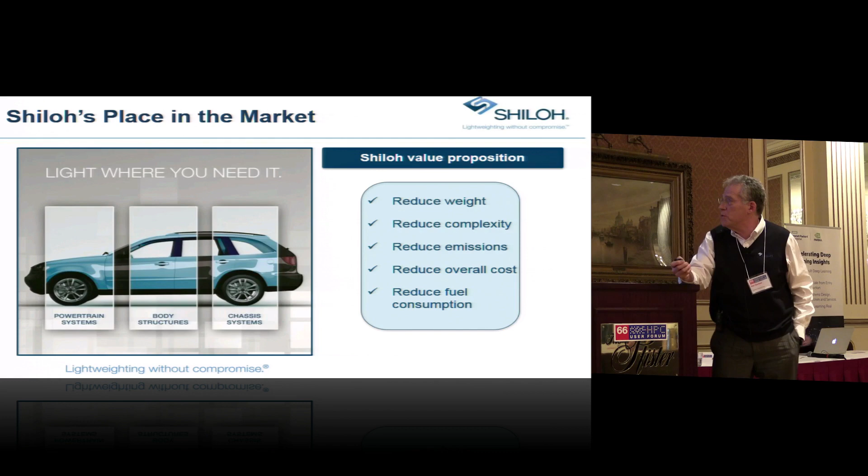As an organization, we work in a variety of different materials. One of the things about Shiloh is we like to think we're material agnostic, so we really don't care what the material is—it's a matter of finding the right material for the application. That's very telling because that's exactly what's needed in the industry now, as we're mixing more things together to come up with integrated structures that will help us lightweight, reduce emissions, and so forth.

So closures, driveline suspension, engine transmission, propulsion systems—we make parts for all of these bits of the automotive puzzle. We're in all three major continents: the US, Europe, and China. So we're offering these kind of similar solutions globally.

And that's of interest to the OEMs, because they're looking for the ability, if they're launching a project in a location, to launch similar projects with the same company in various places, since they're making platform identities more similar—it reduces their overall launch cost.

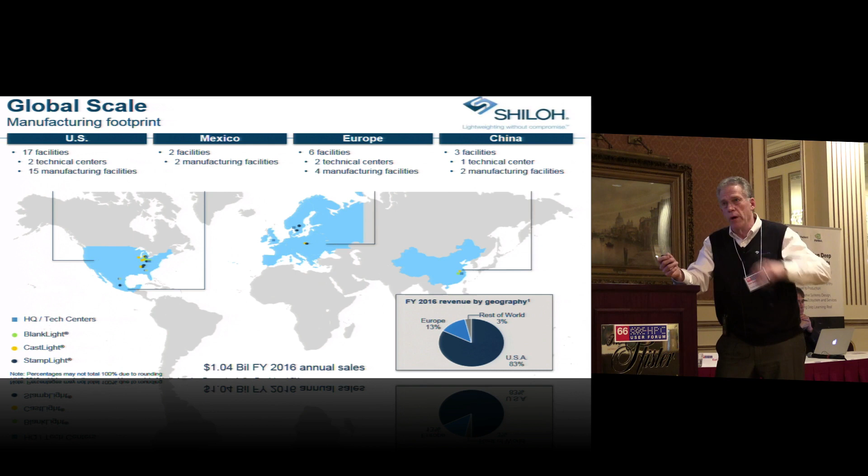So we're all over the world. We're about $1 billion in sales, a little bit over as of 2016, and we figure we'll be about the same this year. We're doing organic growth and growing with acquisition.

We all know about our transportation world—we have a lot of density problems, we have emission problems, and there are lots of trends. We're looking to drive emissions down, we're looking to drive miles per gallon up, and one of the ways to do that is to make sure the vehicle frames are as light as they can possibly be. That's one of the things we work on.

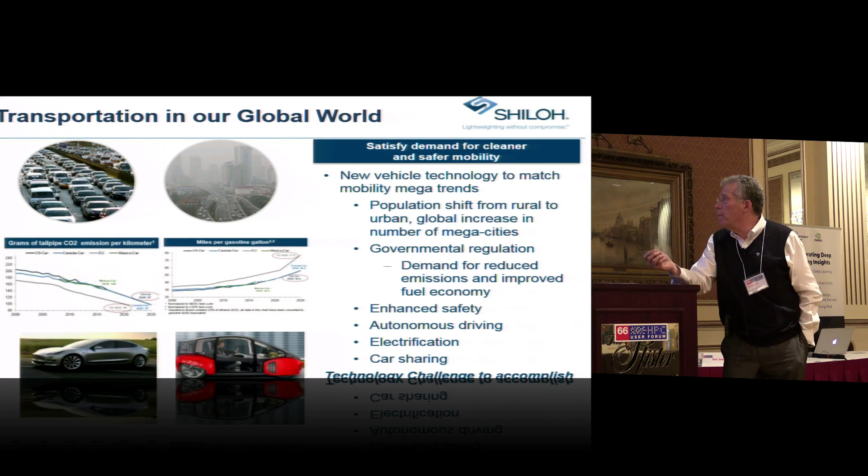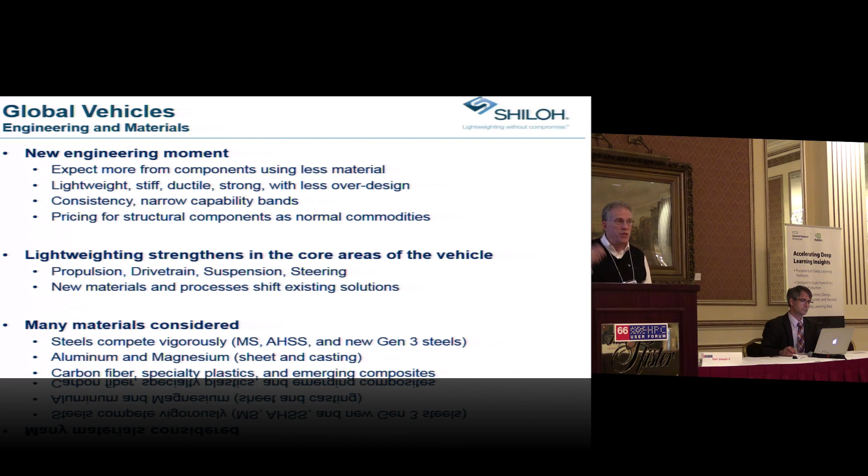So we're on this vehicle platform, in a new engineering moment. The OEMs are expecting more from the components using less material. So it's about lightweight, stiff, ductile, strong, less over-design, with consistency across the whole range of production. If I'm making 1,000 parts per day, all 1,000 parts need to be within that capability range for the properties they expect.

We're talking about replacing bits of the automotive puzzle that people's lives depend on. So it's extremely important that the consistency of the process—just like with chips, just like with medicine—is the same with these components that make up the frames of vehicles. We need narrow capability bands in our processing, and as important as anything else, customers want to buy structural components like they're regular commodities—nothing special, just perfectly executed every time.

So lightweighting is important in all four of the domains, and there are new materials coming out along with new processing that allow us to change this engineering conversation in every one of these component areas.

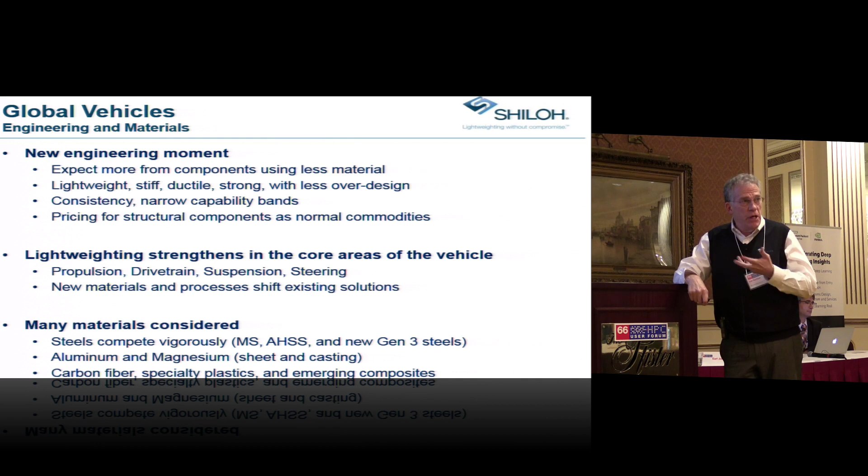A lot of parts are considered. Steels are still a primary focus in vehicles—they're inexpensive and there's a lot of good analysis behind them; they're very predictable. Aluminum, magnesium, both sheet and castings, are some of the things emerging into the market, as well as carbon fiber, plastics, and other emerging composites. So this is all the things that are changing.

We know the framing of body in white and panels, so body in white is that bit of the puzzle of building the vehicle. That's before the doors are added, before the wheels and suspension are added, all the closures, the seats. It's just before they dip it in the white paint before it comes up.

So these areas are traditionally steel, but in the process of driving this lightweight conversation, they're moving more and more into other materials.

One of the advantages is the simulation in the CAE for steel is very well developed. It's got a lot of history. These are components that are on the shelf in every one of the OEMs. They can take it down and say, okay, I'm going to use this steel for this application. I know how it's going to respond over the whole life of that particular design. So it's very low risk.

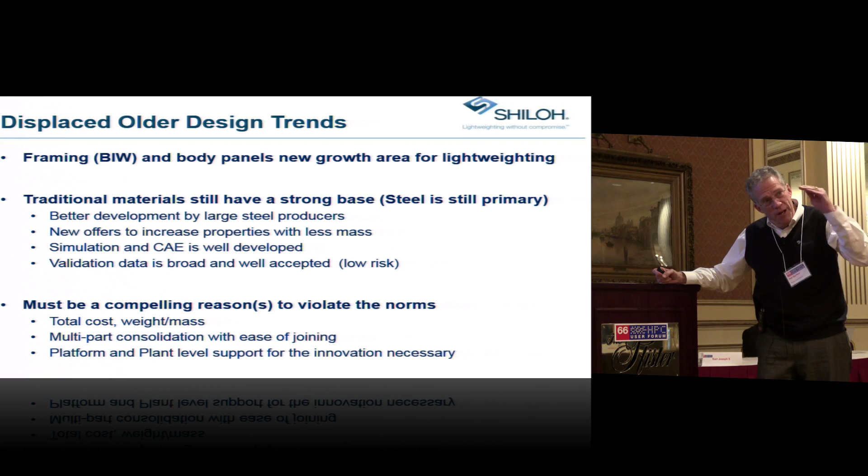So there's got to be some compelling reason, and by compelling, it means compelling and then validated with data, a strong reason to make a change. So you have people pushing, but at the same time you have engineering resisting, because engineers are typically conservative and they want to make sure that the integrity of the product remains at a very high level.

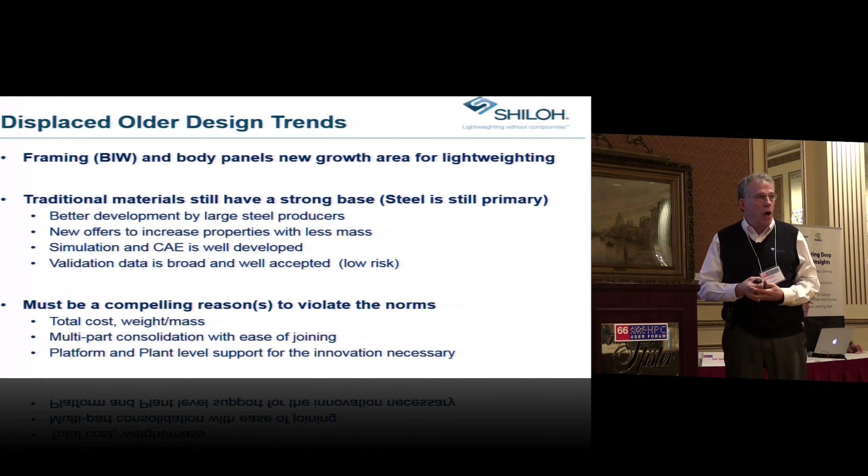So I'm kind of building a case as to why we're interested in the computing that comes from having big machines and big cores running a lot of nodes and analysis on the things that we're doing every day.

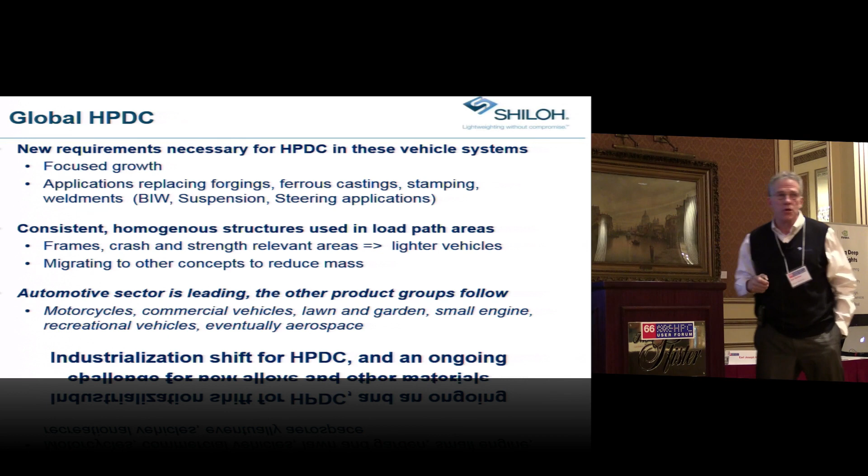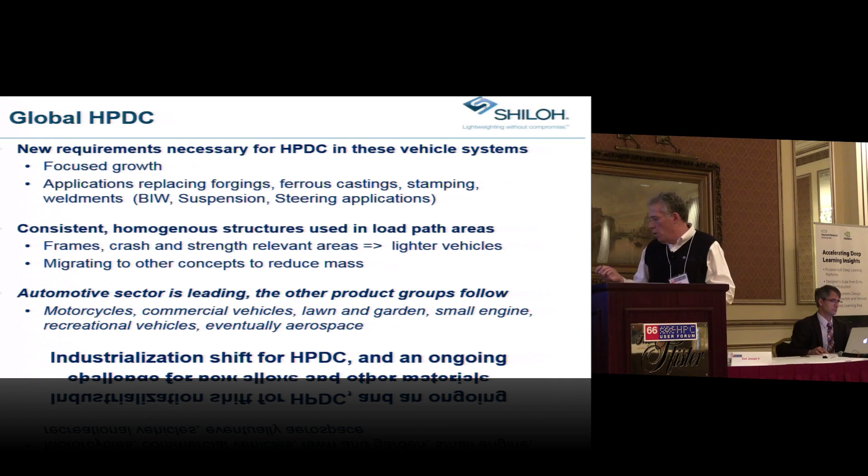You have to migrate to other concepts to reduce the mass. And whereas automotive is starting, it's going to follow all the rest of the vehicle structures and a lot of other white goods and so forth to be able to do lightweighting, using less of the material with greater properties every time. So if we look at the process of one of the casting processes we're engaged in, which is this high pressure die casting puzzle.

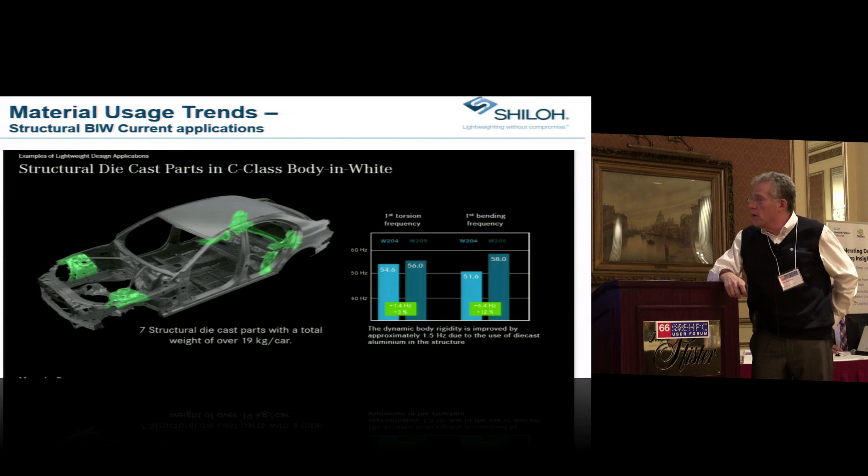In Europe and a lot of European vehicles, and starting in the US, there are a lot of places where these structural members are being introduced into the framing of the vehicle. And as you can see in this particular Mercedes vehicle, you got a 20 kg reduction in weight. So that's a big incentive to be able to take both the weight out and the cost out in these particular areas of the vehicle.

There are a lot of other vehicles that show up as being places in that frame where lightweighted structures end up being an opportunity.

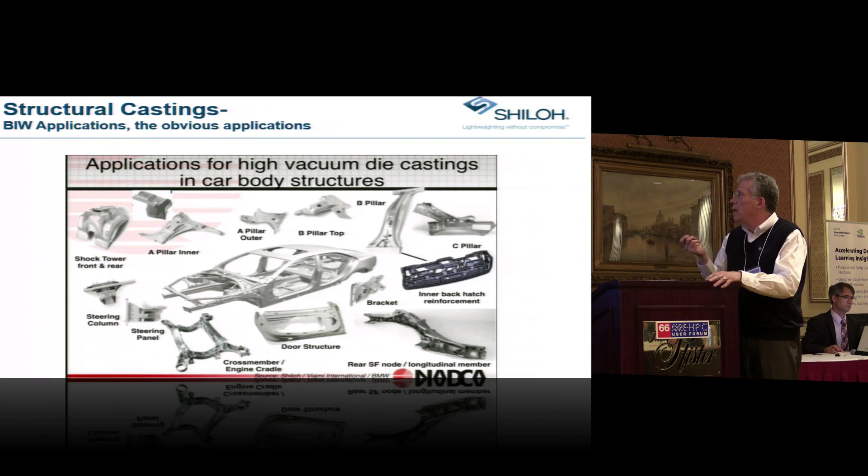If we're looking at the casting, there's the older casting methods which are gravity fed, which obviously are a lot simpler to model because they're moving at a very slow fill rate, and you can model a lot more simply. But the area that offers the greatest opportunity is this high pressure side, which has the greatest challenges on the modeling.

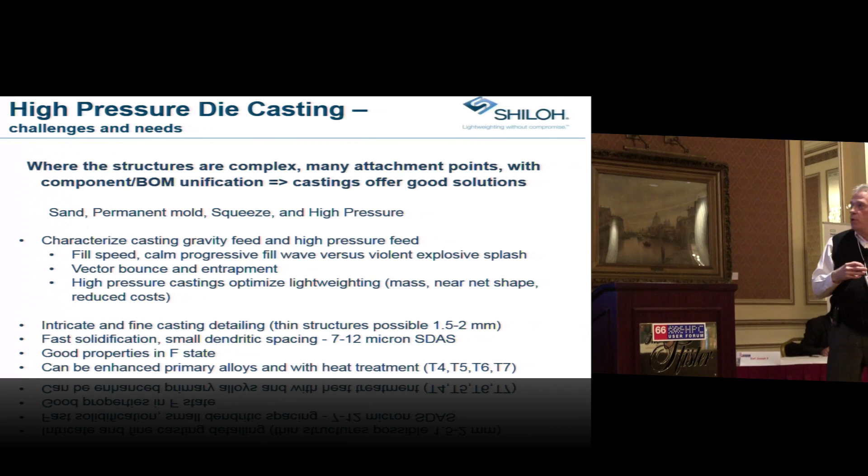So we talk about the high pressure having a fill speed that's very fast rather than a calm progressive fill. It has violent splash parameters on the inside of the die. It's got bounce, it's got entrapment, and that's an area where a lot of the casting optimizing and lightweighting is having a big impact.

So you've got fine details, might be a millimeter and a half or 2 millimeters or 2.5 millimeter wall sections. They're big castings, filling out over big areas. You've got very fast solidification. The dendrites are in the 7 to 12 micron spacing. It's got good properties without having to heat treat it. These are some of the advantages of being able to go with this very fast fill method.

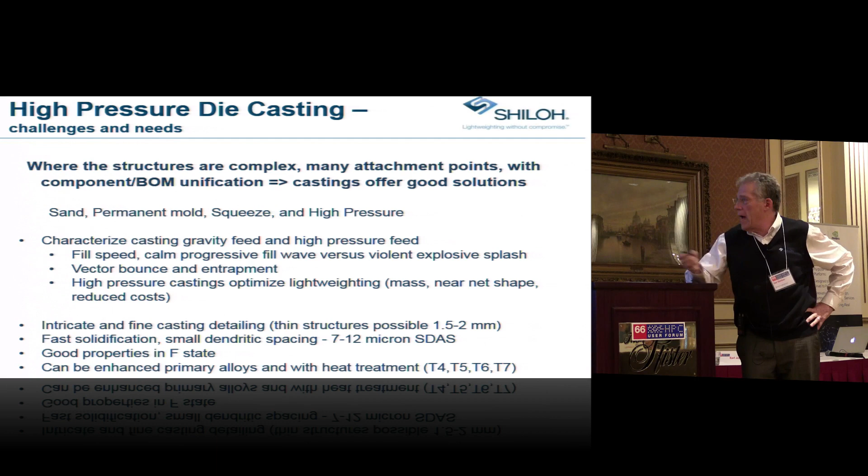And you can even enhance it with heat treating if you're doing the right things on your casting process. So one of the things that was looked at earlier was the dendritic size as a predictor of what the mechanical properties are for a particular shape.

So if you start looking at what would be the other casting methods, we have dendritic spacing that's maybe up between, let's say, 50 and 100 microns. And to get the necessary properties, you would have to heat treat them.

If you look at some of the casting, the high pressure casting methods, we've got dendritic spacing that's down in the 10 or 12 normally, and with stuff we're doing with some of the new technology, we're down to 6 to 9 microns in the spacing between dendrites. That ends up being a very good predictor of high properties, and that's one of the things we need if we're going to put these in a structural application in a vehicle.

So if you consider the modeling case, we've got this metal velocity that's moving. Maybe it's got a 15 or 20% fraction solid, so the viscosity is something you can predict within a range. It's typically pressured through a 3 millimeter gate, so you have a kind of atomization spray at maybe between 1,500 and 2,500 inches per second fill speed. Complex structures, very small radius, so you can imagine the modeling challenge of having 2 millimeter, 3 millimeter radiuses and corners and trying to see how that structure is going to fill.

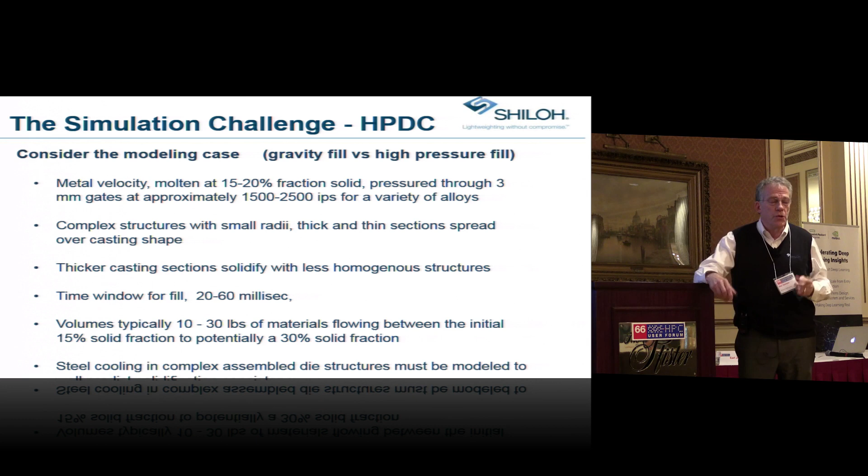Then, if we can model the cooling effectively, we can reduce the dendritic structure even smaller, because the dendrites are a function of cooling speed. And we end up getting 10 or 15% greater properties in the same kind of geometric shapes. So if you put the hat on of the engineer saying, okay, how am I going to get more properties out of less material? This is the path that I need to be taking.

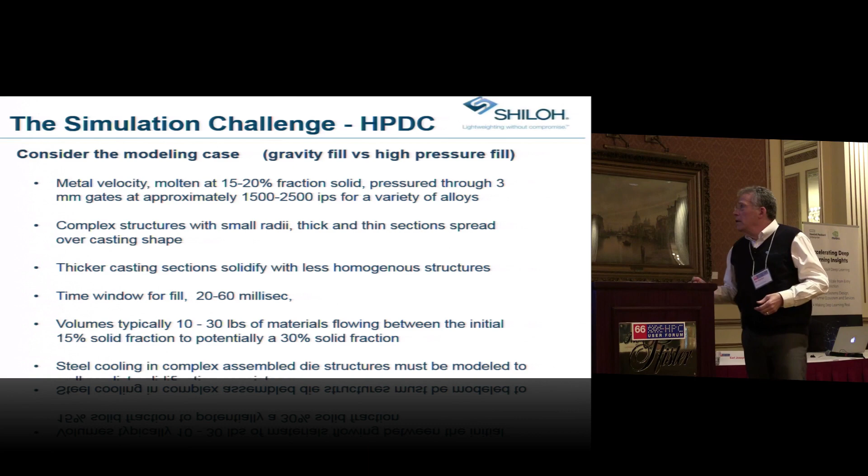So one of the things about castings is typically they were always over-designed because you couldn't end up predicting a homogeneous structure. So you would end up saying that if I were designing around 150 megapascals for a particular kind of Goodman curve yield on the life of a component, I might design around 70 if I have thick walls. So it was a kind of over-designing, which is very costly, and it's not something that engineers are looking at continuing to support. So the only way to be able to reduce the over-design is to really have a continuous homogeneous structure on the inside of a casting wall, which has to solidify quickly, it has to solidify the same way, and it has to be free of gas. And those were all problems that were part of the high-pressure die-cast solutions.

So we do all that right, and then we lightweight by reducing the mass of those typically loaded castings through the design and what we can do with our design areas. So this is kind of the challenge. You have this fast fill, you have streams of metal that need to flow together, and they need to knit and intermingle, and it's all happening in this 20 to 60 millisecond time window.

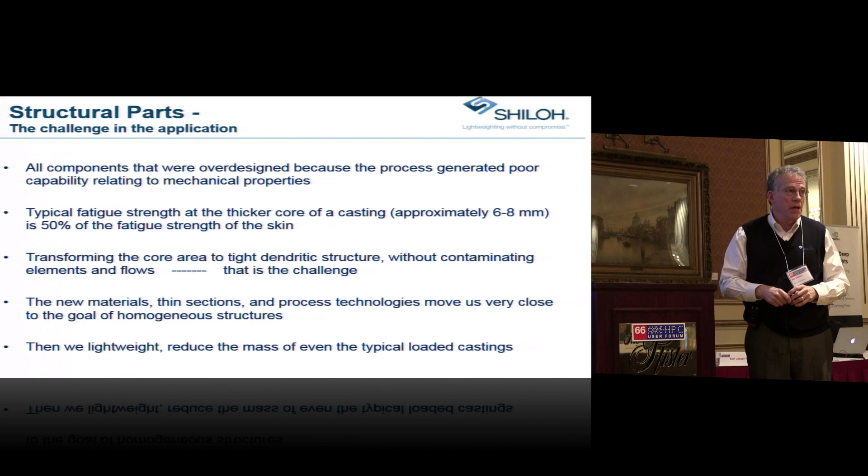So one of the things you typically have with a typical die casting is you have a skin which solidifies very quick, and then you have a core which is typically full of gas. Now, metal pressure and Boyle's law will take those bubbles and turn them so they're invisible based on the amount of metal pressure you're bringing to bear. But if you try to heat treat the part, they all blow up again and you end up with a discontinuous material. The other thing about typical castings is you would have a different dendritic structure. You might be double the dendritic size in the thicker core than you are at the skin.

One of the things about these new structural parts is they're almost all skin. When we're talking 3 millimeters, you've got a skin on each side and almost nothing that's core on the inside. So if you're managing the properties of the raw material effectively, you have the possibility, and it's something that's proven in the parts we're making today, that you can make these structures very homogeneous and such that they can be predictively analyzed in the computer models that exist today.

But the main thing is that you need to be able to do the modeling effectively. So it used to be they would do shell modeling. So I would have something for the skin on both sides, and I'd do something different in terms of my mesh on the inside for the web. And that was, I could put lesser properties in the web, and I could make the skin tighter, and I could end up with an analysis.

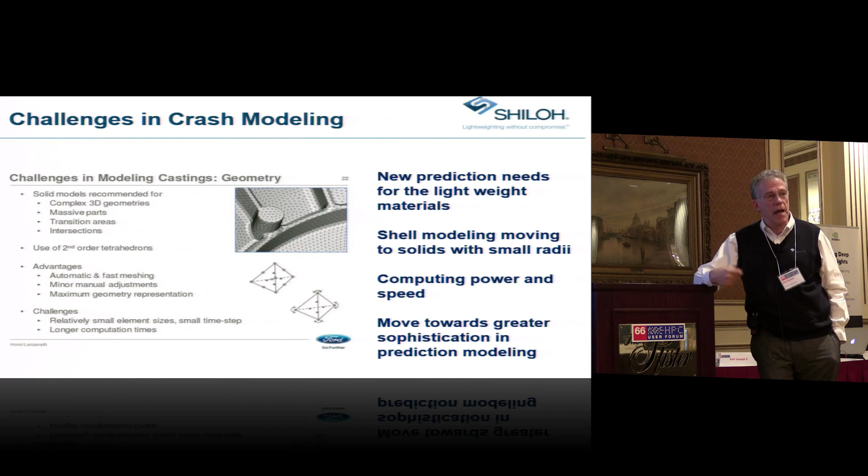The trending now is to make it all the same with small mesh, which means the computing power has got to be that much greater and the analysis time is longer. So that's what we contend with, that's what we need from the industry.

We need to be able to predict, because if we're feeding in one area of the part, we'll end up with different differential properties on one side or the other just based on the cooling gradient between those two areas of the steel. So cooling, and I'm bringing it up again because this is what Adrian's going to talk about in his part of the presentation, that we need to model better. The cooling is critical for us to be able to continue to make these homogeneous structures as good as they possibly can be.

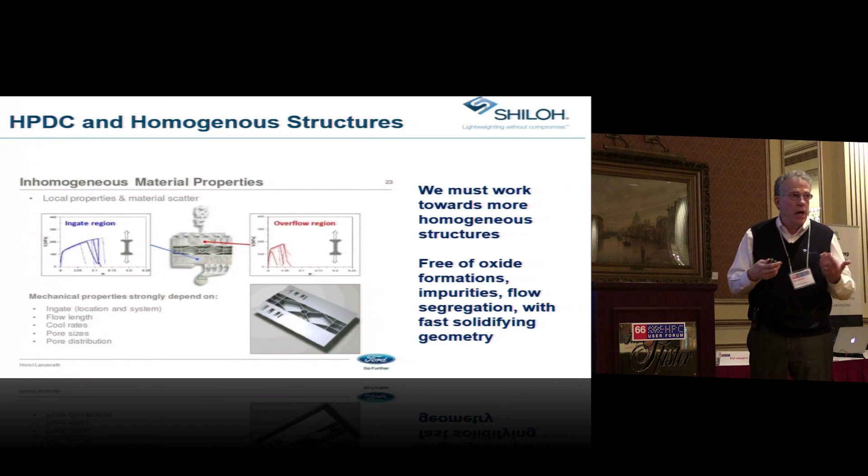So of course it's not just dendrites. You've got to be free of oxide, you've got to be free of impurities, you've got to have all the pieces of the puzzle perfect. Otherwise, you can have a good structure that is poisoned by bad practices. So the two things go hand in hand. Your practices have to match a really tight control of your process capability.

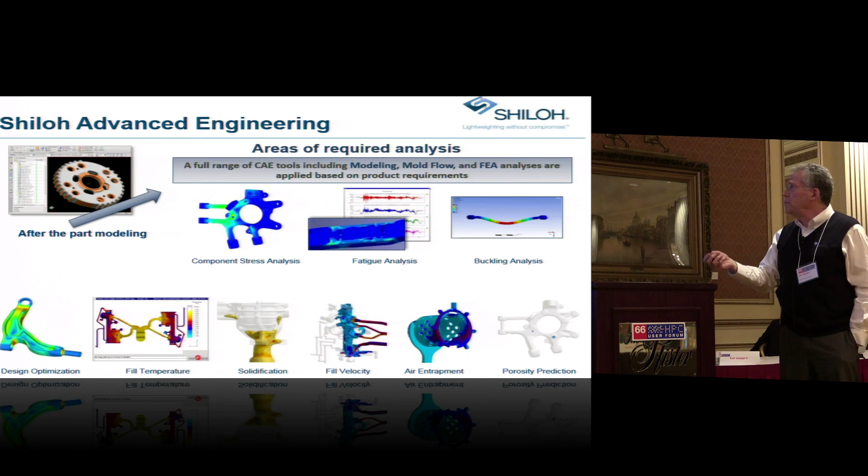So typically we're doing all these different kinds of analysis. These are all things you've seen. We're using Magma, we're using Flow3D. We use them differently based on the complexity of the parts.

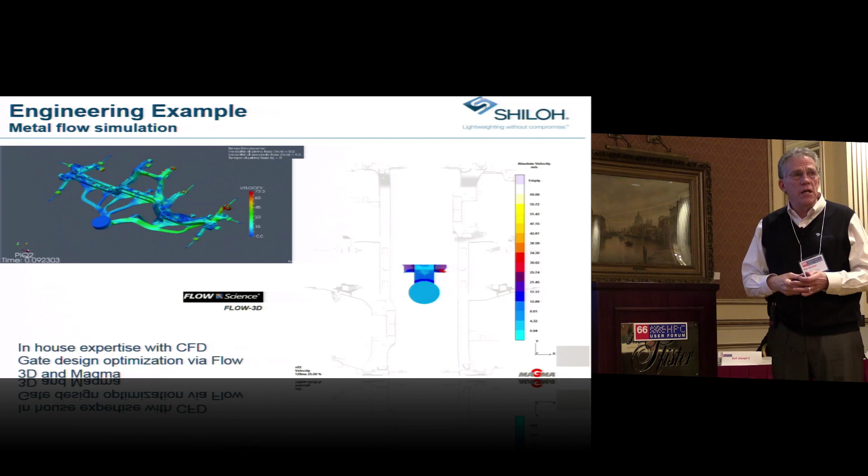If, for example, I'll just run one of these. This is an IP structure, so typically this would be the tooling we would use. That happens to be a Flow3D simulation. I have a Magma over here as well. This is the kind of clarity and the kind of definition we need to be able to predict how the streams are going to flow together, how the metal is going to knit, and the properties ultimately that casting is going to see. This is kind of what we like to see.

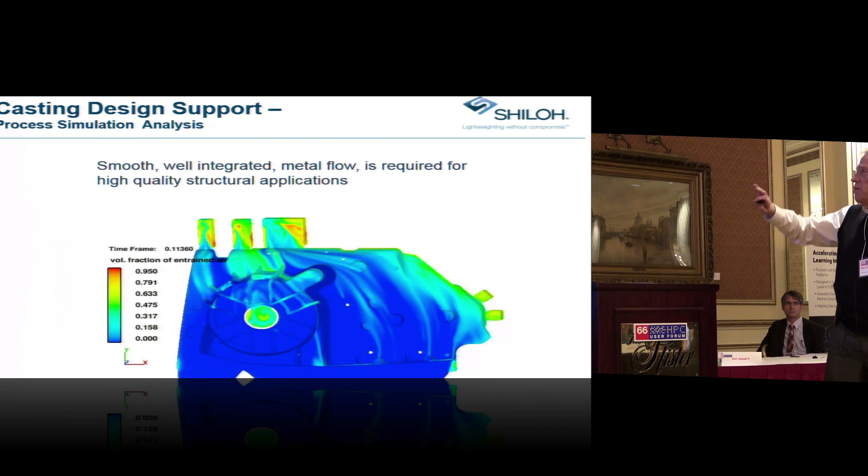This is a shock tower that is used on GM. You can see that you've got smooth flows, everything's running together, and it's over the part into those overflow sections.

Another thing that's interesting is we need to predict, and this is another cooling factor, the areas as solidification's happening that would end up being puddles of hot mass in the middle of cold sections, because that's what will generate shrink voids, which then reduce the mechanical properties of that geometry that you're casting.

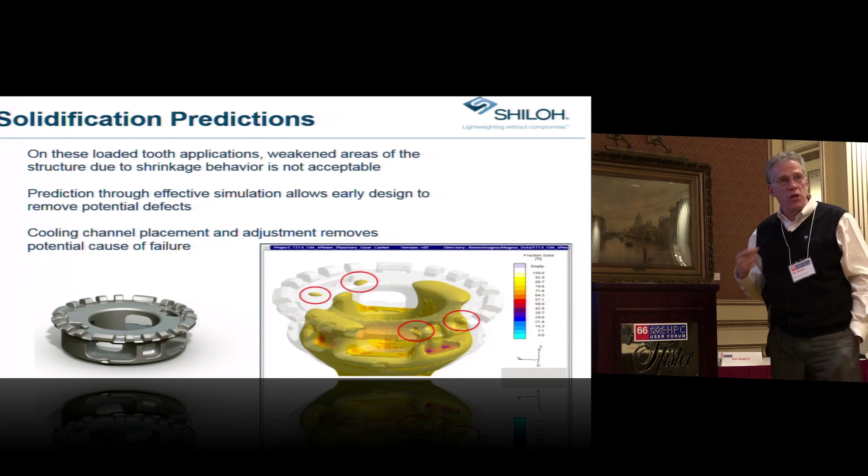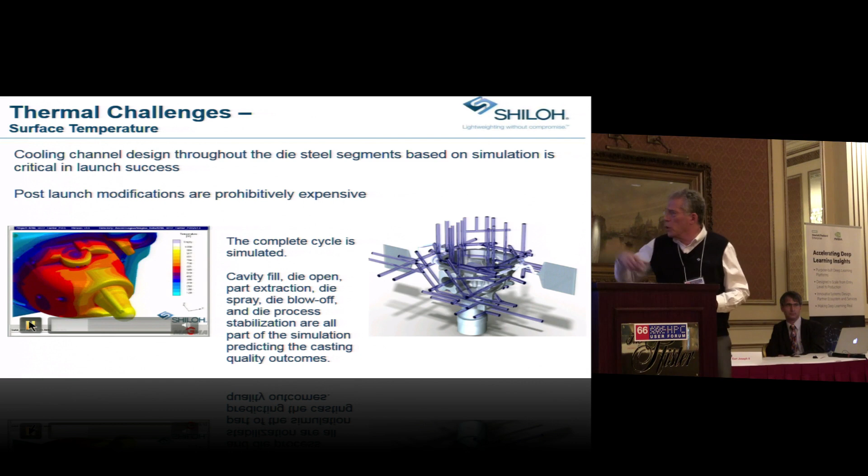We end up with modeling the cooling, looking at how is it solidifying. So these are all things that we model to make sure that we are going to be able to make a good dense casting.

As you can see, the more complicated the part, we end up with a lot of different structures that we're working around. We end up doing iterations, and we don't want to iterate these in steel. We want to iterate these in a computer where it's inexpensive relative to doing this with a $500,000 die. I can't cut this up and continue to put different cooling passages because I didn't figure it out very well the first time. I got to have first pass success.

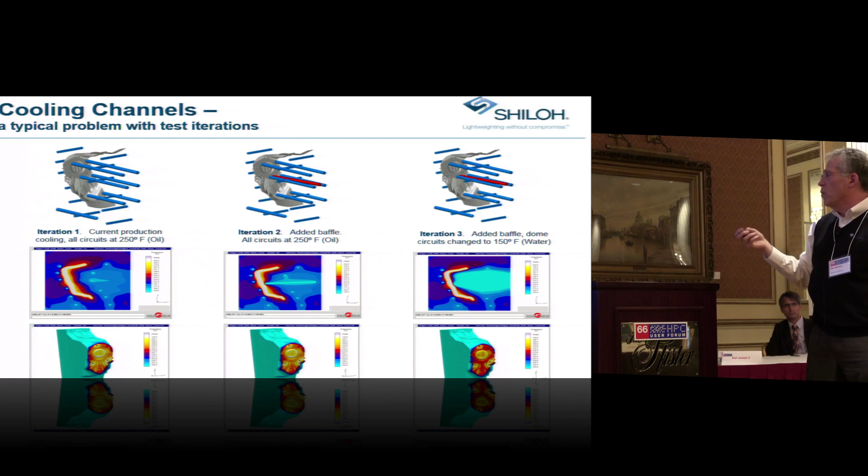And this is what we do to end up generating those kind of results. So this was the challenge, and this is why we had Oak Ridge help us with this in this collaboration. Adrian's going to come up and talk about some of the findings and what the process is looking like.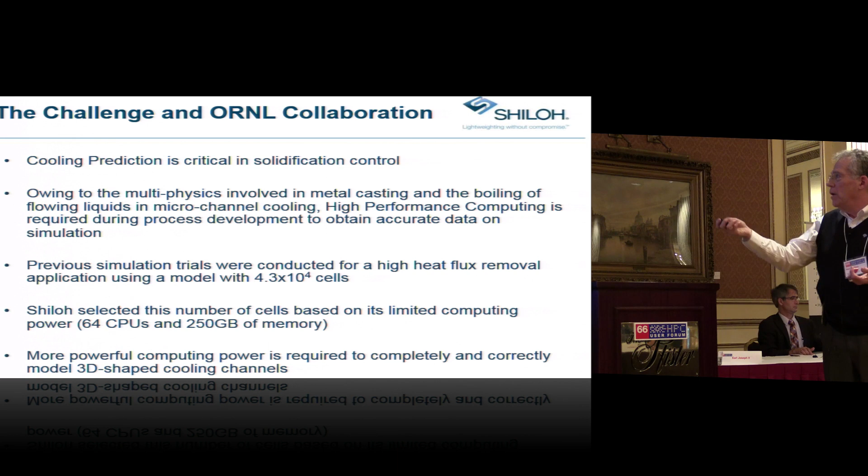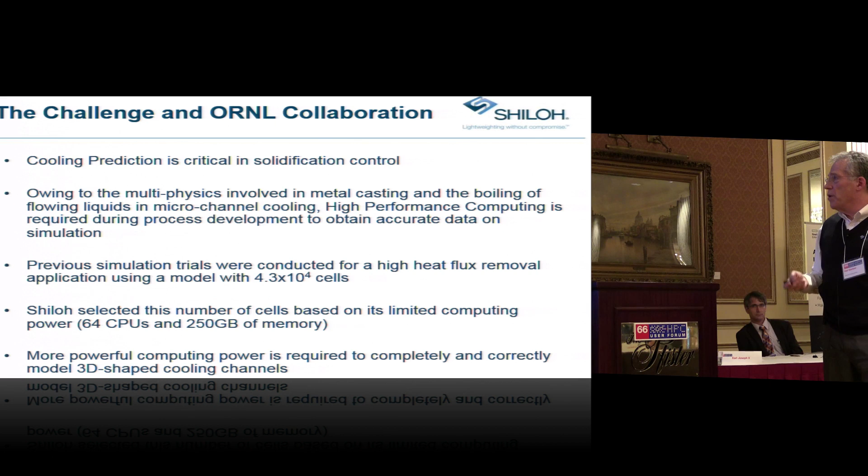Cooling prediction is critical for solidification control. Where the multi-physics of this and the microchannel cooling, we need lots of computing power. As you can see, the CPUs we have inside of Shiloh are too small to be able to manage this. They work for a lot of our other simulations, maybe it takes a day, maybe it takes 2 days, depending on how complex and how many nodes we're fussing with on the model. But we needed more.

So we set up this concept called microchannel cooling, testing boiling models, some heat transfer stuff, and assessment of the model for microchannel, validating the transfer coefficients and identifying the configurations to make the most sense. So from here, Adrian is going to come up and talk about what some of the results were, and then I've got a couple slides at the end just to kind of conclude.

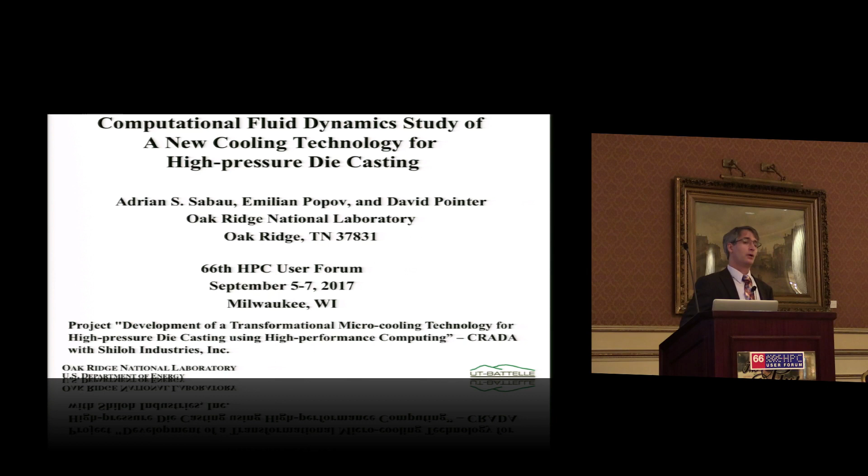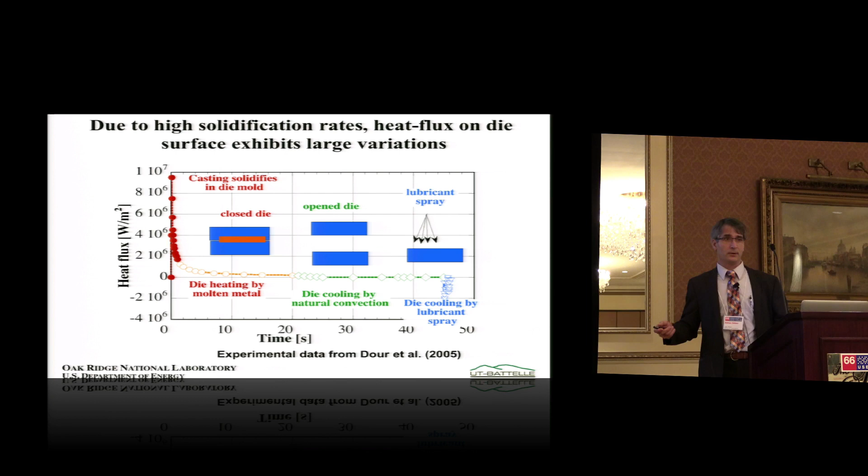During this very high heat flux, the die itself experiences some very high swings in temperature. In this particular example, the die temperature was measured with a pyrometer, and the cutoff for that pyrometer is 350. So the swings in temperature are actually from 200 up to almost 600, and that happens with every shot.

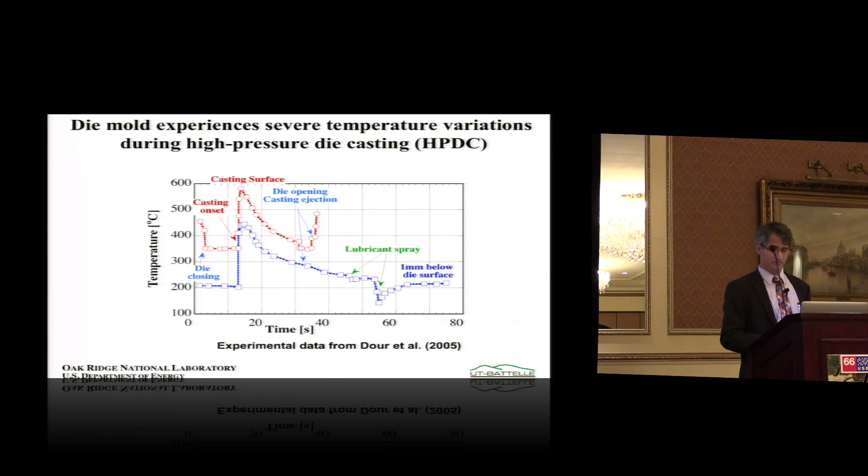You can see here different parts of the process: when the die is closed, when the billet is injected, then the die opens, and the casting has to solidify within that 20 second time frame. So how are we going to cool that die?

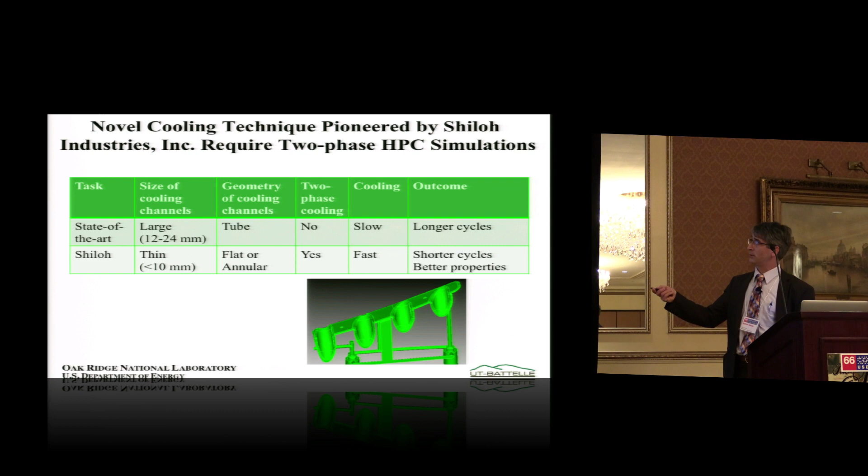So Shiloh proposed to use mini channels, and they can come in different shapes, from flat or annular in geometry. The benefit here is brought by two-phase cooling. You have basically boiling of your coolant, and that provides an increased heat transfer coefficient by about 5 to 15 times, resulting in shorter cycles and better properties.

The challenge we faced is that there are not really any correlations available in the literature to prescribe how this flat channel or this inclined channel is going to cool. This is just one die insert pictured here, cooling of a die insert. The die is actually, let's say, 10 times larger than this little image.

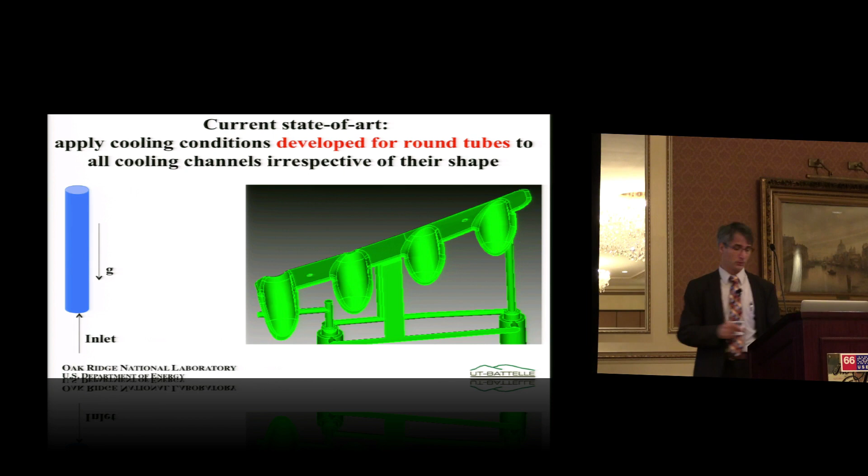Again, the challenge is that the only correlations available in the literature are those for round tubes that are used for boiling simulations. So we set up to analyze some of these configurations, and we looked at some of the flat channels in this work.

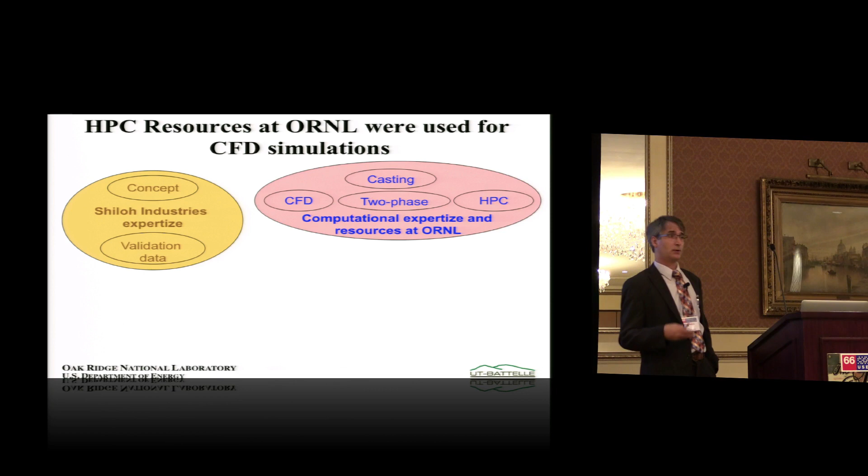How's the project proceeding, I guess? Shiloh came with a very nice concept, and it was matched up with our expertise in metal casting, computational fluid dynamics, two-phase experience from, let's say, nuclear reactor and fusion energy, and of course high-performance computing.

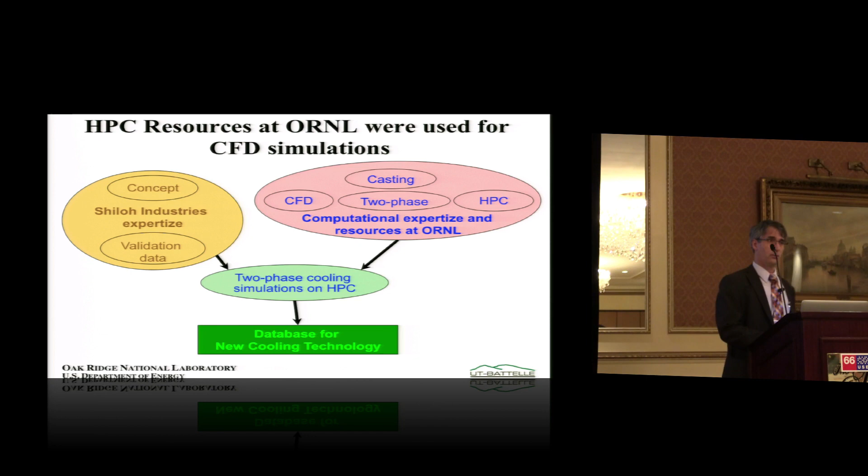So we're going to analyze, we're going to look in detail at two-phase cooling for these unique geometries, and we're going to provide a database that can be used later on in large-scale simulations for the process itself. This is just a small cartoon illustrating the data exchange between the team.

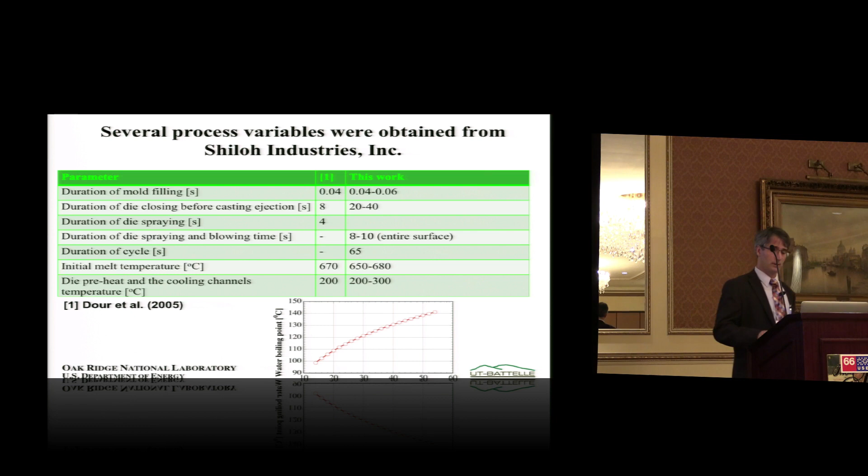I just want to illustrate that water boiling, I guess, depends on the pressure of the coolant. We'll take that into account. So again, we came up with simplified configurations that we can take a look at.

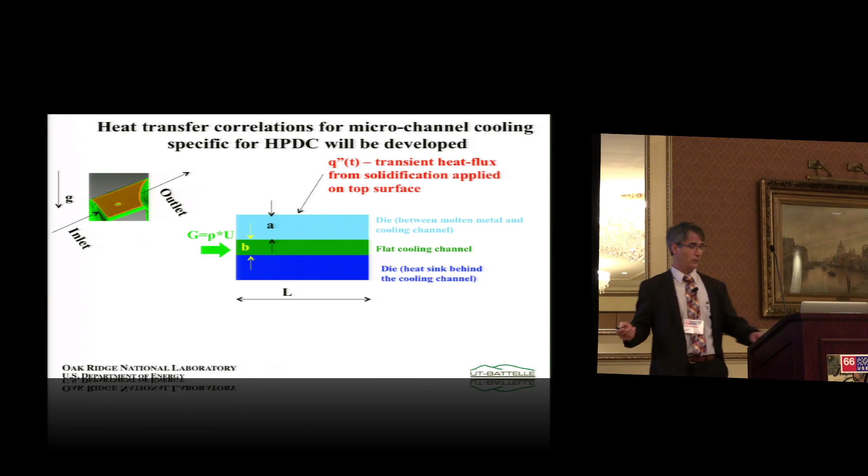This is our geometry, which has quite a few factors here. If you look at the main design variables, there's what I called the die thickness here on top of the cooling channel - green is the cooling channel. This is die to cooling channel distance, and B is going to be the width, the thickness, of the cooling channel.

Then you have a certain mass flux of the water, of the coolant.

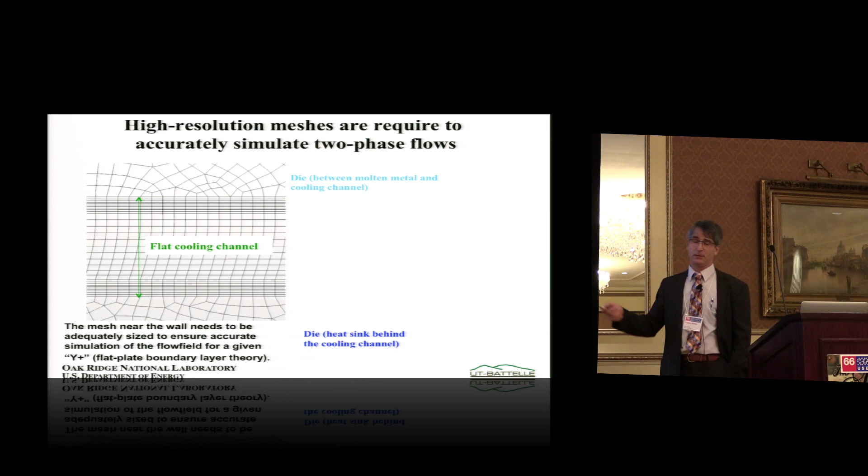So guess what? You have to mesh that channel very nicely because, we know from turbulent simulations, you have to have a very nicely defined mesh nearby the walls. But that's not the whole story.

We spoke about our design variables, and we're trying to see which of these design variables are actually going to produce some valid configurations that can be used in practice.

If you think through the cases here, you can consider 4 cases for A. I guess I didn't put the units here - millimeters, and this is kilograms per meter square seconds.

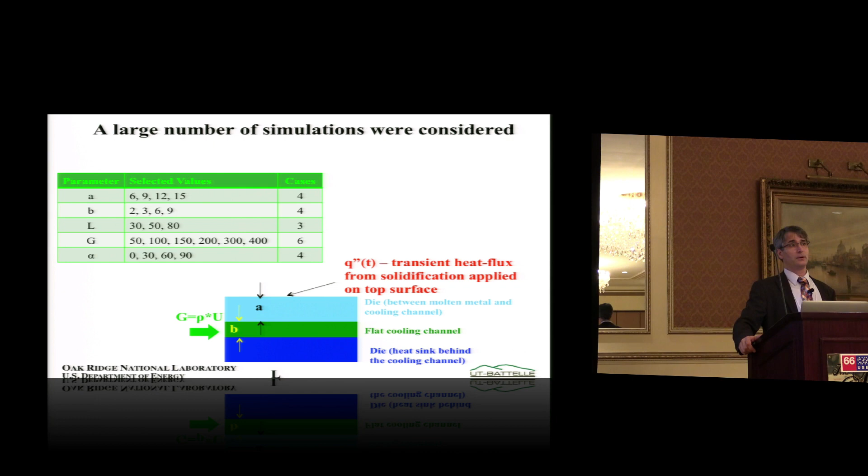And the other aspect of it is going to be the inclination of the entire cooling channel. You have more than 1,000 possible configurations here. So high performance is not only needed,

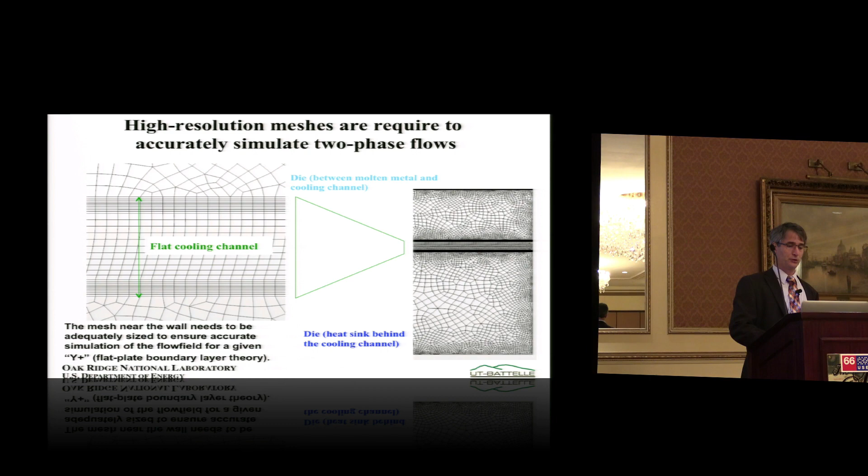I'm going back, if I can, to the mesh size, which is not a small mesh either, but also the number of cases that we simulate. What we're looking for is the optimum. If you run with low mass fluxes, you will have boiling, but your temperature will go through the roof. If you have very high flow rates, you're not going to have efficient cooling because you're confined to the liquid. So the optimum is somewhere in the middle.

Some of the results that we got, I'll try to be as specific as I can. For a 9 millimeter thickness, that's a die right here on top of the cooling channel. The molten metal will be up on the top surface, and the molten metal is not simulated. Instead, we impose that heat flux that I showed on the first page, and we're trying to see basically what flow rate we need for the coolant to keep the die temperature under some acceptable numbers.

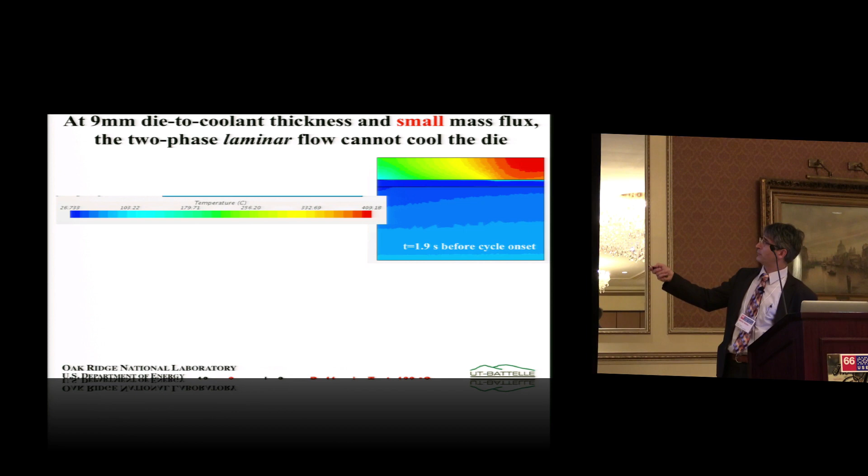So you see, this is before cycle onset. We simulate a couple of cycles in order to make sure that we reach steady state. And just want to mention here that we also take a look at the

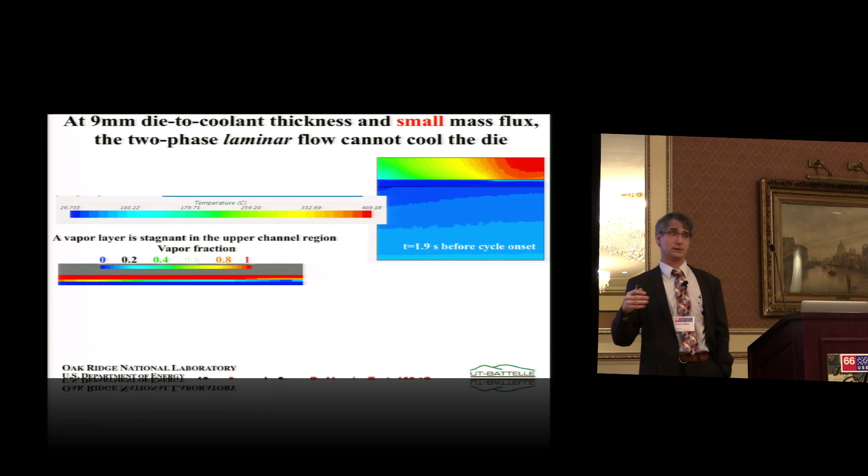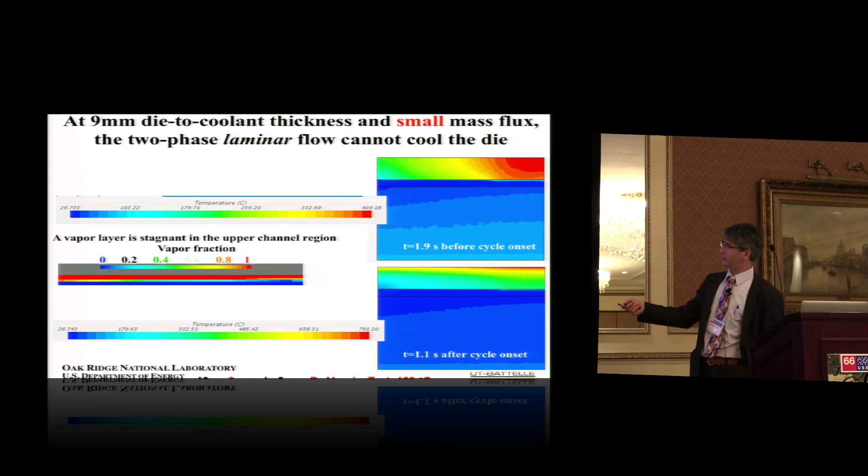amount of vapor that's generated in that cooling channel. Sometimes we don't have any vapor, and we discard that case. Sometimes we have too much of it. In this particular case, we found that at low, small mass fluxes, even before a new cycle starts, the top of the die is actually insulated by a thin layer of vapor. So it stays there, it doesn't get removed at all. So when the new cycle starts, no wonder that temperatures go through the roof. We have about 790 here.

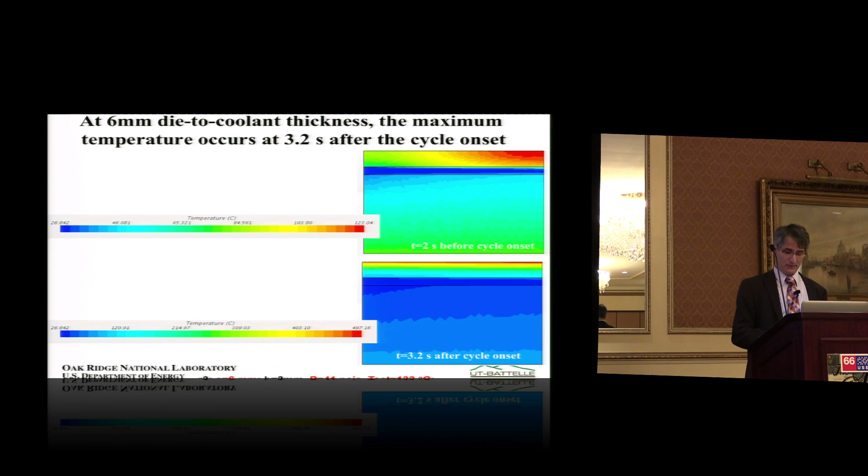For another configuration that we looked at, here we have a smaller die-to-coolant thickness. If you take a look at these temperatures, we came down from 790, I guess, to about 500. The die can reach up to 600. So it's a very acceptable number.

Let's look now at, in this particular case, the last case. Again, color-coded blue is no vapor, light blue is some certain fraction of vapor. The units here go from 0 to 1. If you have 1, everything is vapor.

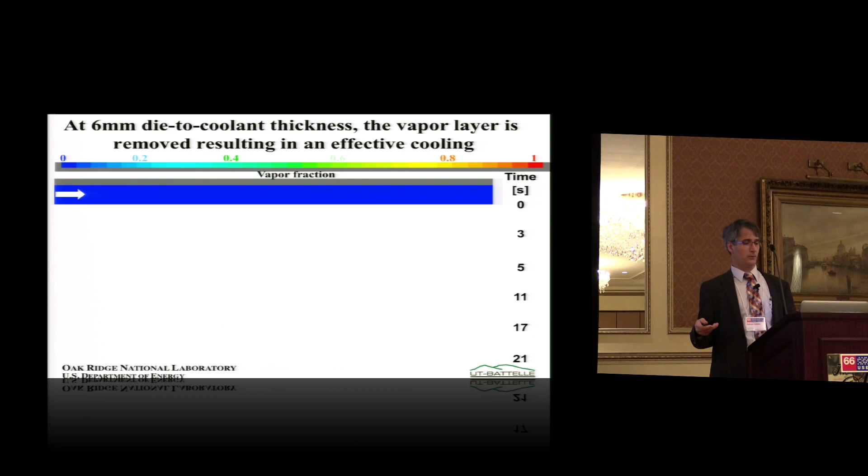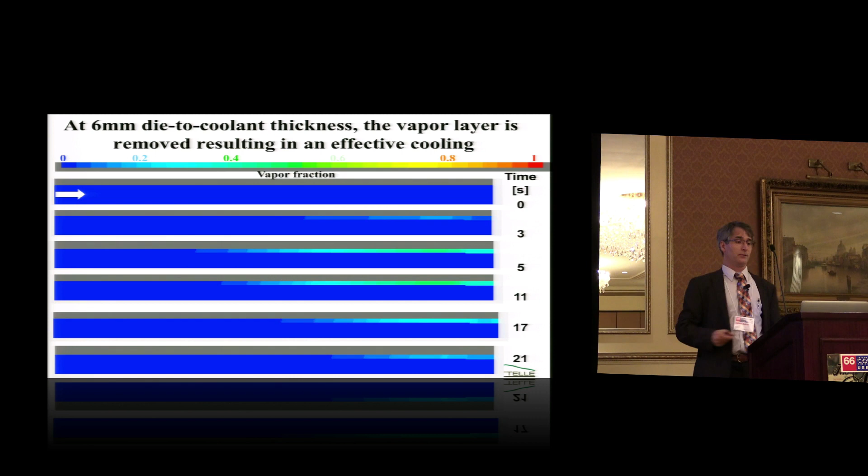So initially there's no vapor, because it turns out that the fluid has actually carried out that top layer. You see how it forms? It's interesting, it proceeds like that. You have a liquid layer confined on a vapor layer confined on the top of the channel, and it gets convected away as the cycle proceeds. This is a very good example, that's what we would like to see in our designs.

So we identified at least one design that is going to work. More data here: if we look at the die surface temperature, we identify that this parameter, which we call A, die-to-coolant thickness, is very important because you can overheat the die if this dimension is too thick.

So the take-home point here is not only that the cooling is important, it's important where that surface is placed. Is it going to be up close to the die, or is it going to be away? We know that if it's away from the surface, it's not going to be efficient.

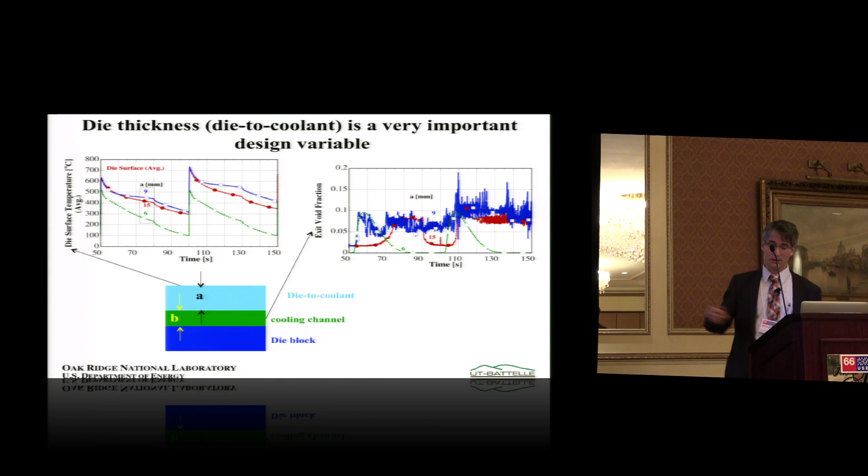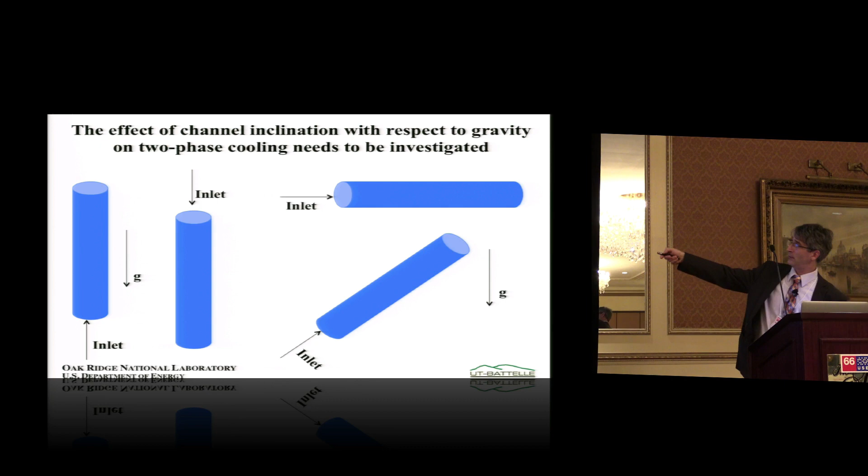And again, we spoke about the inclination of the cooling channel. I'd like to emphasize that all the data in the literature is limited to the vertical and horizontal. There's not much on the inclined. But sometimes we have to use inclined surfaces too. And actually, in this case, not only have the coolant from the bottom, but for the upper die, we have to inject it from the top.

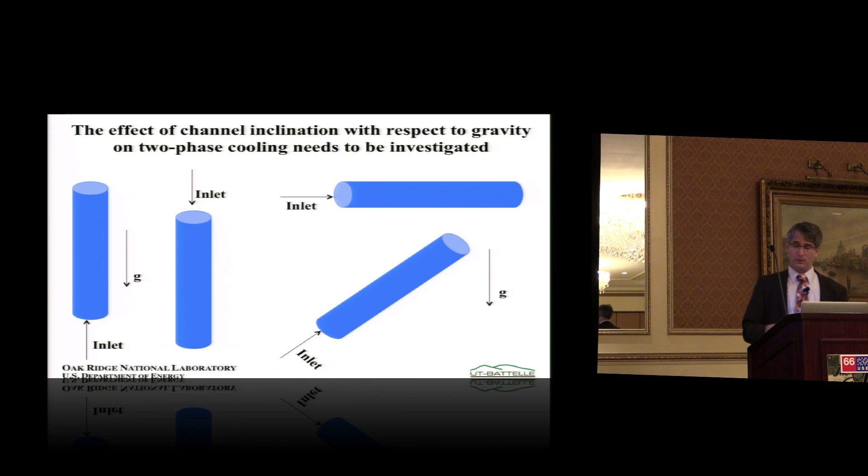So we got one example in which we actually found that for this configuration, the die overheats, exceeds far away our threshold of 600 degrees Celsius. And if we incline that channel, for the same flow rate, nothing else was varied, you get reasonable temperatures. So the inclination definitely has to be taken into account.

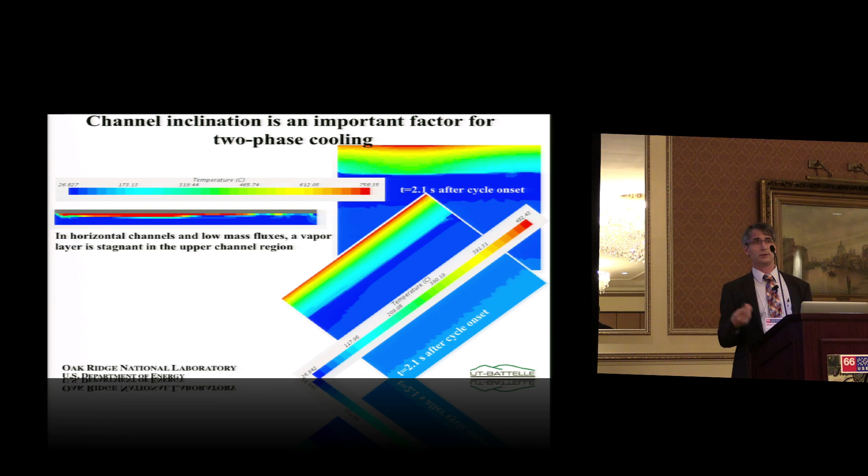And you can see here again that insulating vapor layer, so I guess the horizontal channels are the least desirable in this case. While again, we have evidence that between cycles, that insulating vapor layer is actually convected away very nicely. So you have boiling, no boiling, boiling, no boiling. The cycle goes up and down.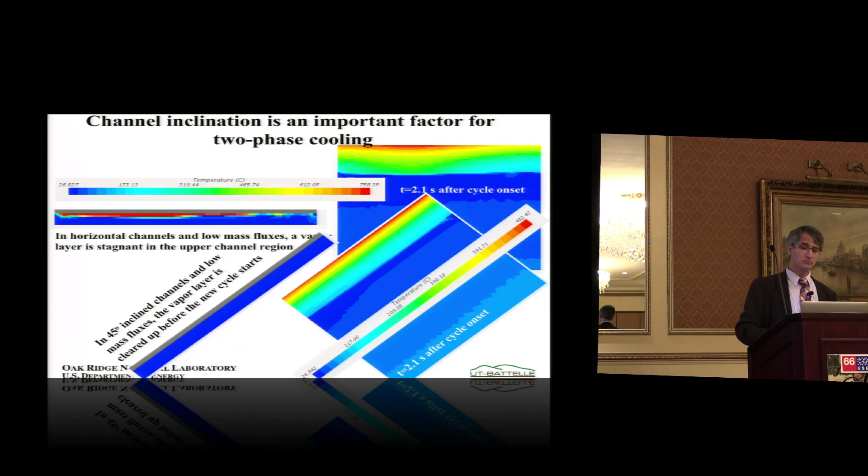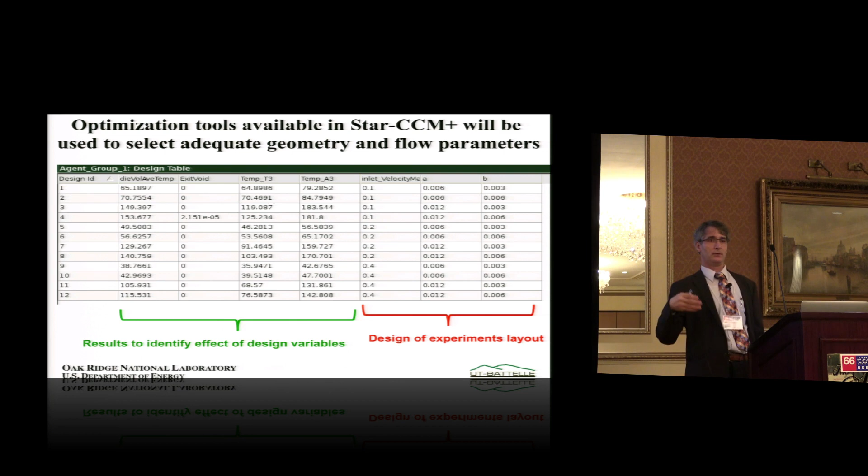Finally, what we like to do, and we just set up, we're going to use the optimizer in Star-CCM+, and this is just a few cases that we ran. This is our design of experiments, and we set up our template to monitor some of the criteria, and we're going to screen some of these designs automatically, and then we can find out, again this is provided from that simulation that we ran.

What you see here is kind of a sensitivity analysis. What this tells you is, for example, if I'm looking at the effect of that die coolant to die thickness, the higher the number from 0 to 1, the more sensitive that variable we're going to follow is going to be. So identify that this is very critical. Turns out that the dimension of the cooling channel is not that important. Interesting.

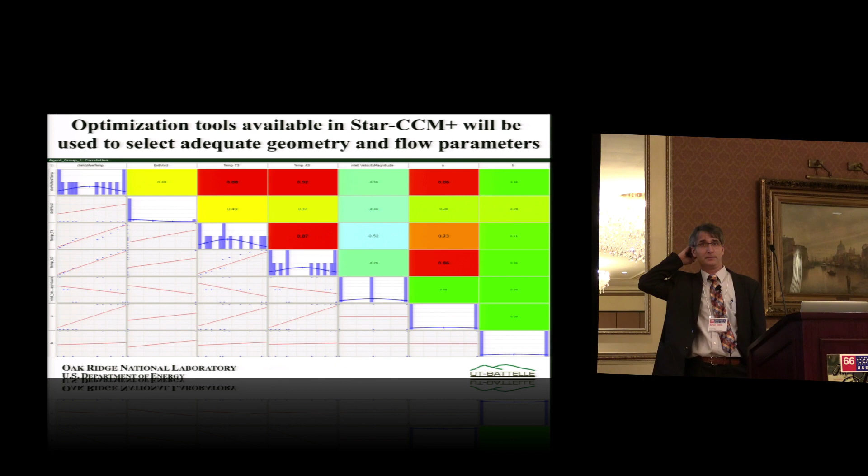I guess this slide concludes my talk, and we're halfway through the project. We have a lot to cover, but I think we have a great start. Thanks to the great collaboration from Shiloh.

The one thing to mention here is that what you're seeing here is a piece of the steel section that maybe weighs about 6 kilograms, and it's an insert sitting into the die.

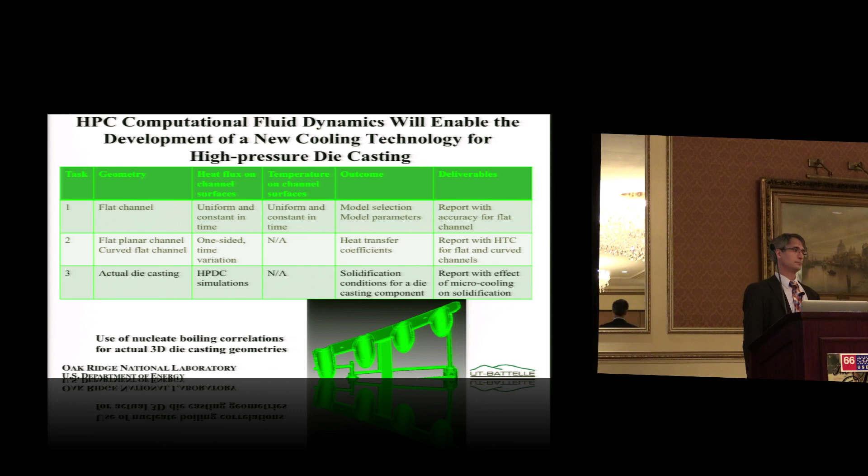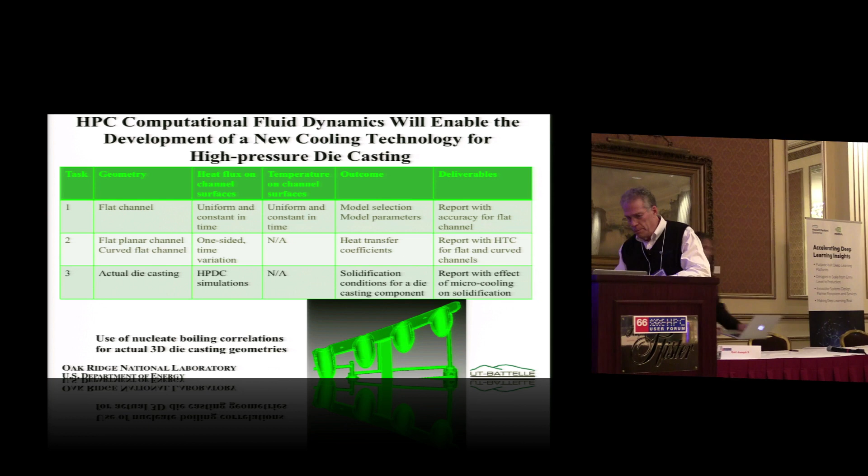So partly the next thing I was just going to mention was why do we care? So we're doing all this analysis, we're looking at how the cooling is going to affect the various channels and kind of optimizing this case. So the simple fact is that if we're too hot or too cold, the die life is vastly reduced. So that means cost to customer is extremely high.

Let's say it was a typical die with a primary material which is kind of abrasive on steel to start with, because it's got low iron content since you're trying to optimize properties. Maybe you have 100,000 cycles. So if you have a cavity that's rather expensive, that means you're replacing that cavity every 100,000 cycles. Now, if I can get 15 or 20% greater life out of that same cavity set, which I can do if I'm optimizing the cooling, cost to the customer goes down.

So that's one element. Another element is just the resources used that are reduced, and that's everywhere - it's the heating of the metal, it's the casting, it's taking the die out, it's changing everything. It's all that wasted effort, which is waste that we need to eliminate. It's not something that's value-add to the customer, so it's useless, wasted time.

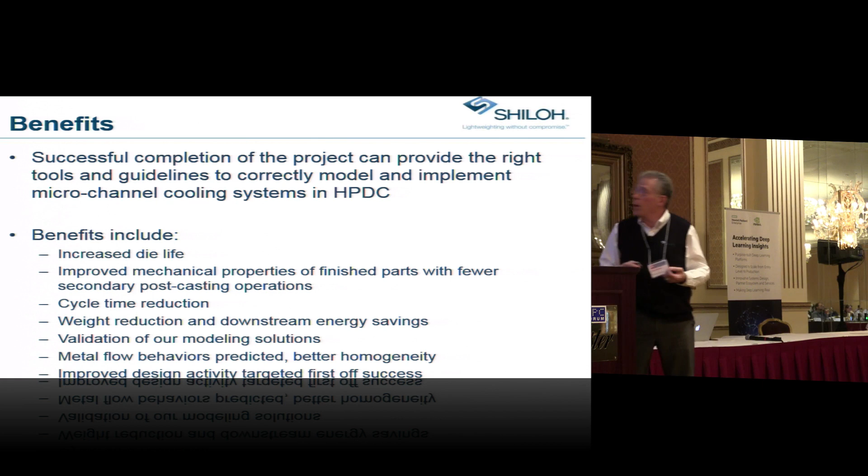I want to be able to design the collapse of the components. With doing some of these changes that we typically do, we're ending up with elongation that's in the 13–14% range, so I'm comparable with what I'm doing with steel, with properties that are good.

The benefits: improved die life, better mechanical properties. There's the obvious reduction factors, less machining. The other thing is cycle time reduction.

What Adrian showed was the cooling going through the line, where I had steam formation at the wall of the cooling channel, and then as it cooled off, it moved out of the way. So one of the things we're looking at is when I make the casting, I have about 15, 16, 17 seconds where that casting is sitting in the die, solidifying. That's what makes the dendritic structure, that's what makes everything tight, that's what makes the properties greater. And if I can optimize the cooling, I'm picking up 15-20% on my mechanical properties without sacrificing a thing, and in fact making the process more efficient. So it's very important for us to manage this cooling activity very carefully.

The other thing is, as I mentioned before, we've got these complex dies, and you want to validate them electronically. You don't want to validate them by making the steel and then remaking it because you figured something wrong. We've also got to have these metal flows predicted very well. In this 30 millisecond window, I need to make sure that metal is binding together with the right kind of properties.

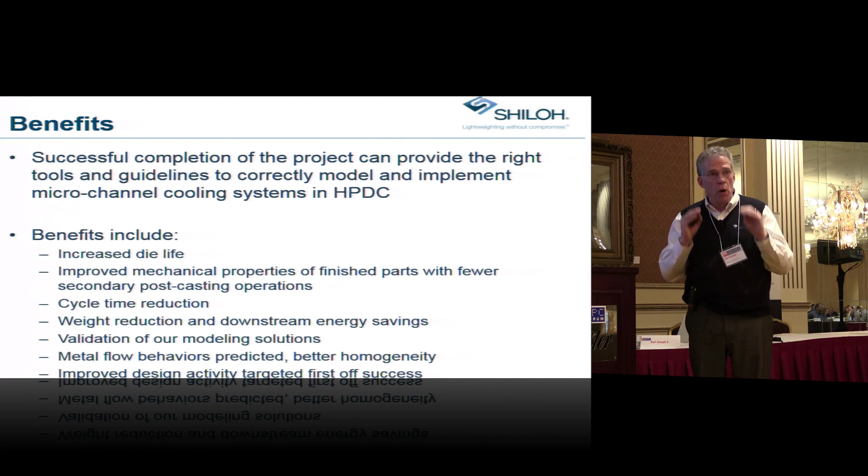So I figured I'd throw in a few examples of where these are being used. This is a cross-car beam, the IP panel reinforcement in the vehicle, and we do this in magnesium. Magnesium is even more complicated because the solidification is even faster and it doesn't flow together very well. So the simulation has to be that much better because I'm filling in maybe 30 milliseconds, not even 40 or 50.

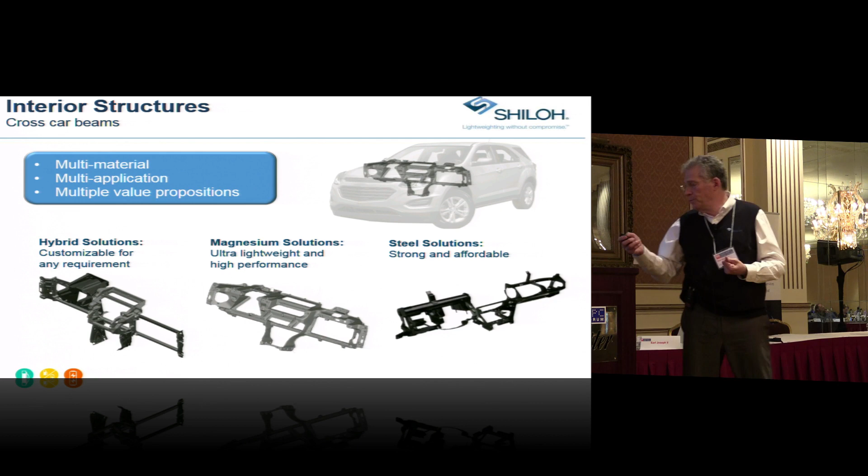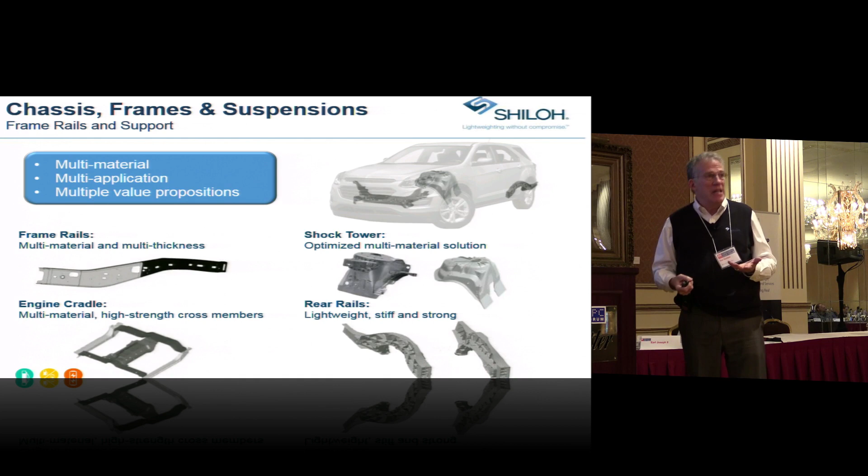We also do shock towers that sit on, as you can see, in the vehicles, various kinds of subframes, rear rails that go over the rear wheel. All of these are crash components that need to have elongation and properties you can rely on.

The other thing we do is I can take and put a heavily loaded aluminum casting in a rear axle that I couldn't do before. That would normally be gray iron, but if I can drive properties up, I end up with a solution that gives a 44-pound weight reduction per vehicle. Significant — it's a big deal.

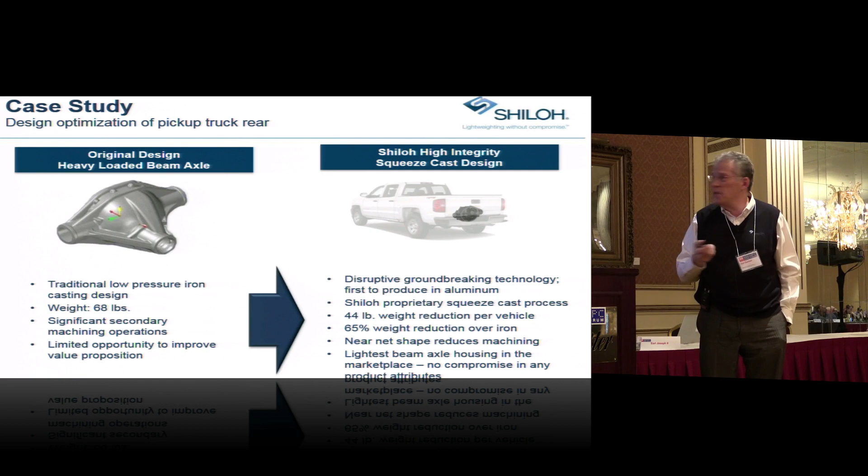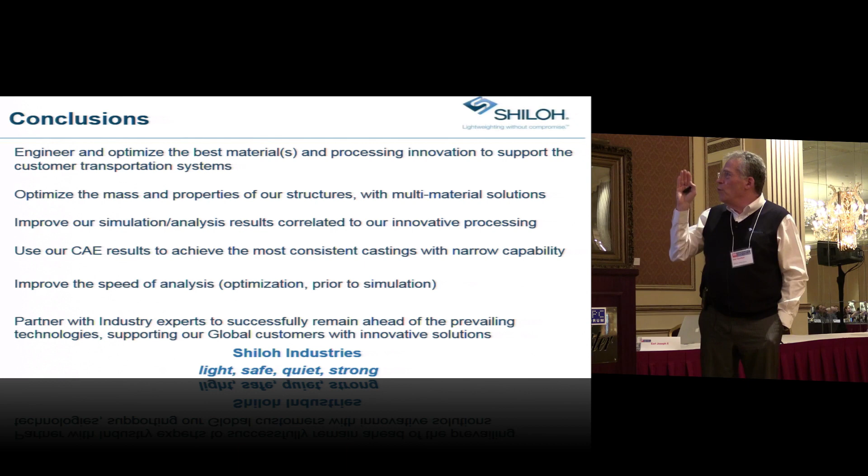So, conclusion: we need to engineer to optimize the best material and processing to support the innovative things that customers are doing in the transportation system. We have the properties and the mass of our structures, we have to look at them carefully so it's multi-material — right material in the right spot. We need to improve our simulation analysis results so it correlates perfectly. We have to use our results to be the most consistent in this kind of narrow capability range.

And then, speed — of course we all want to do it faster. We want to be able to do it fewer times. Typically we could do 10, 15, 20 simulations to make sure we're honing down. If I look at every one of those, it could be a day. I have a lot of time that if I could do faster, it would be much better.

And finally, you've got to partner with the right people — whether it's people in steel, whether it's analysis resources — you've got to partner with the right people to make sure this is coming together so you can validate it well. Because ultimately, the customers are only interested in technologies that they can validate electronically before they risk anything.

Now, it's very unusual that Ford, in the pickup truck, decided to go with this all-aluminum frame. This was a huge radical shift for them. It's very impressive, very, very gutsy, and it paid off. But this is the way the industry is going in North America. Europe is already there, and China is actually going to be moving very fast. So, thank you.